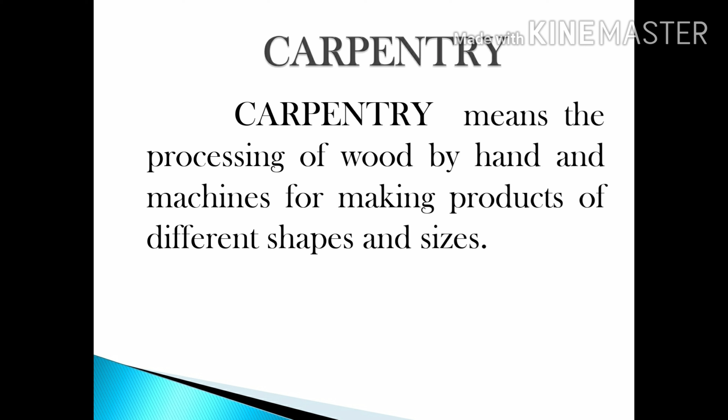We see and handle a lot of wood or carpentry products in our daily life. For example, the wood chair you are sitting on is a carpentry product. Similarly, our tables, desks, and benches in classrooms are real examples of carpentry products.

Now let me introduce some tools and equipment used in the carpentry workshop for wood processing. You can see some pictures on the screen: steel rule, try square, bevel square, marking gauge, saw, different forms of chisels, etc. I am discussing these tools just so you understand the different tools and become familiar with their names.

I know all of you are familiar with some of these tools like steel rule, try square, and chisel. Just try to understand the different names and tools used, and we will have a detailed study of these tools in coming sessions.

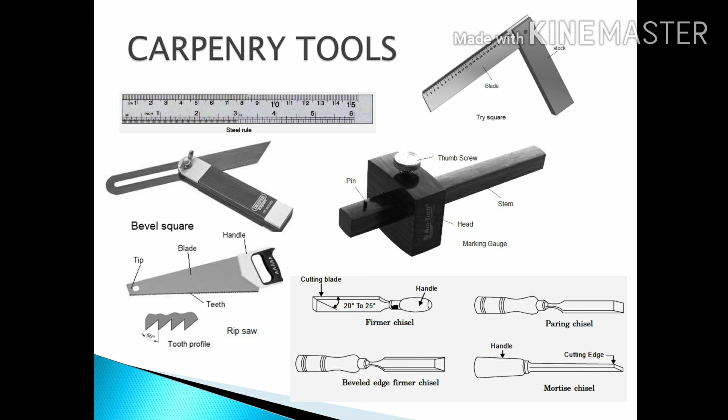Now look at the screen, you can see some models. These are some of the carpentry models we are going to practice in our workshop carpentry shops, including sawing practice, marking and planing practice, chiseling practice, cross halved joints, open halved joints, and one-side dovetail joints. By practicing these different models, students get a general idea of how raw wood is shaped into different products, the different joints, and the carpentry operations.

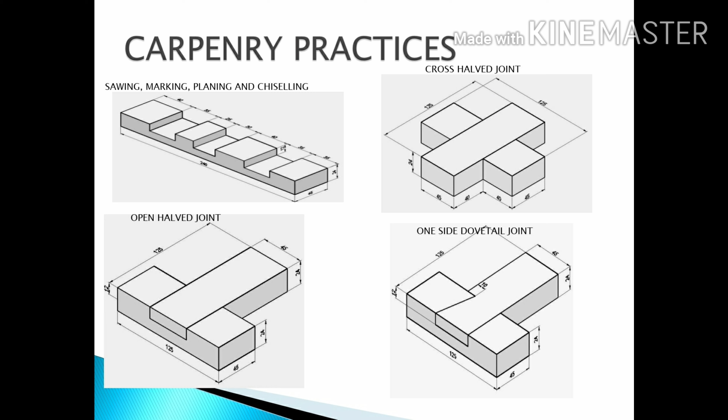The next trade we practice in our school is fitting. Fitting refers to the handwork that must be completed after machine work for assembling parts together. In mechanical engineering, different machines are manufactured by assembling different components. Before assembling these components, we should finish some works manually using hand tools, and these operations we practice in the fitting workshop.

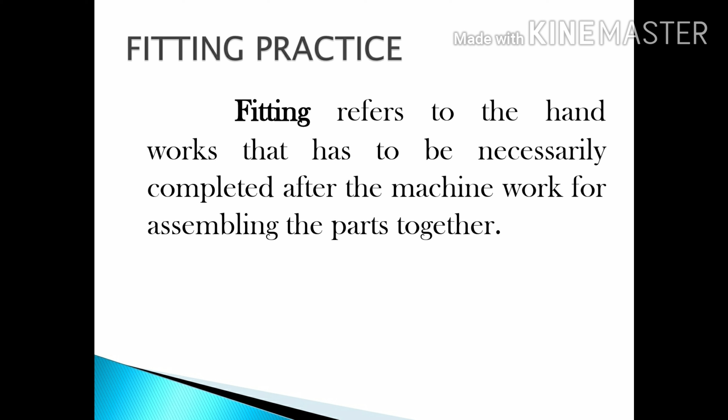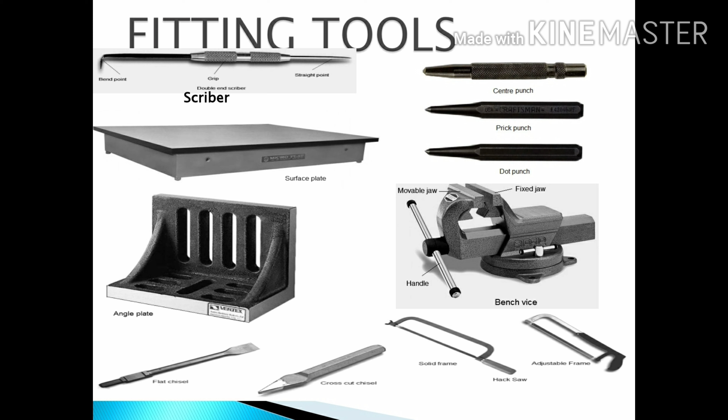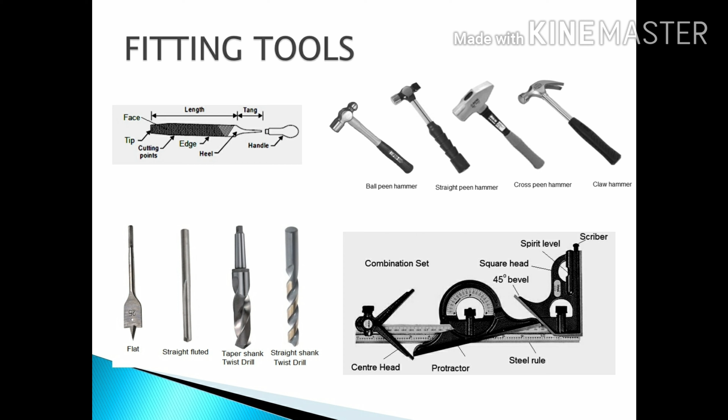Now we can see some fitting tools used in our fitting shop. These include marking tools like scriber, punch, files, hammers, combination set, drill bits, etc. Most of you are already familiar with fitting tools like files and hammers. We will study these tools deeply in the following sessions.

We can discuss the different fitting models we practice in our shop: surface filing, marking practice, punching and hacksaw cutting, L-shape cutting, etc. In the fitting shop, we work on these models using mild steel bars.

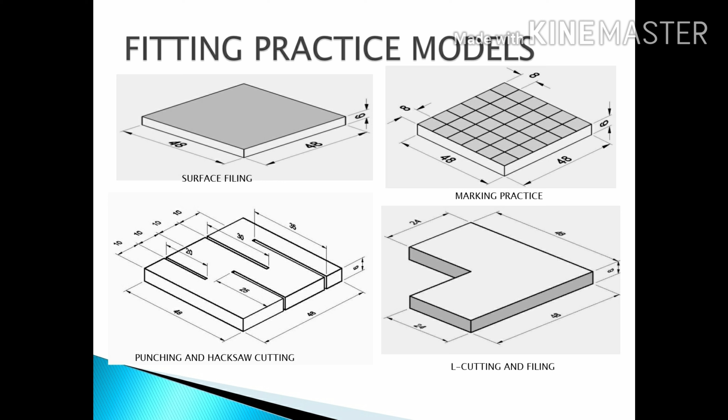The next trade we discuss is sheet metal. Sheet metal work is an operation to produce various household and engineering products from metallic sheets. You are familiar with some sheet metal products like trays, pen boxes, and instrument boxes, all manufactured as sheet metal products.

In this trade, we practice how to work with sheet metal, which means thin metallic sheets. We learn the tools we use in this trade, and finally we practice making some simple sheet metal joints and products.

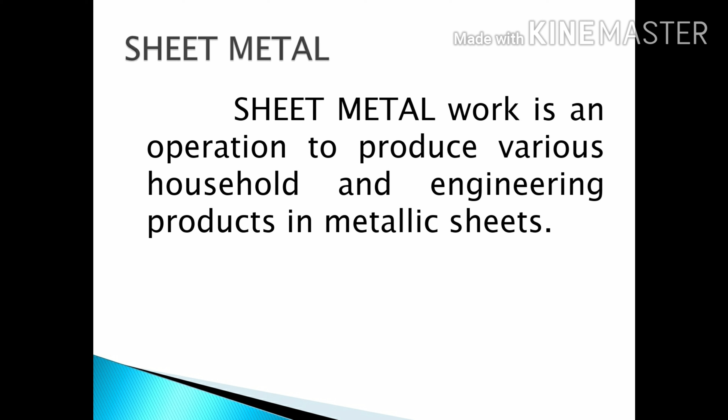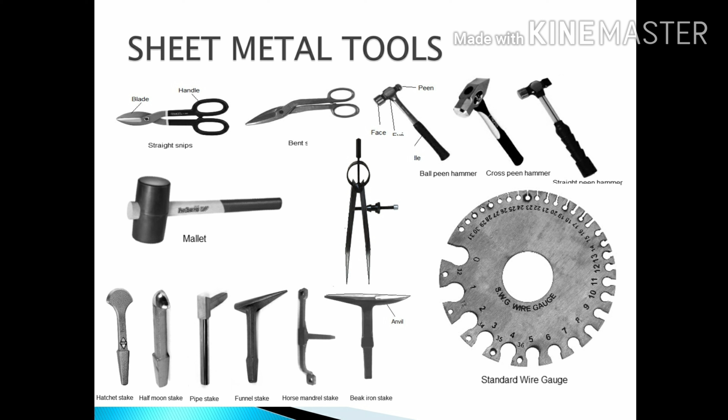In this session we see some sheet metal tools: snips, bent snips, hammers, mallet, wire gauge, hatchet stake, and some forming tools.

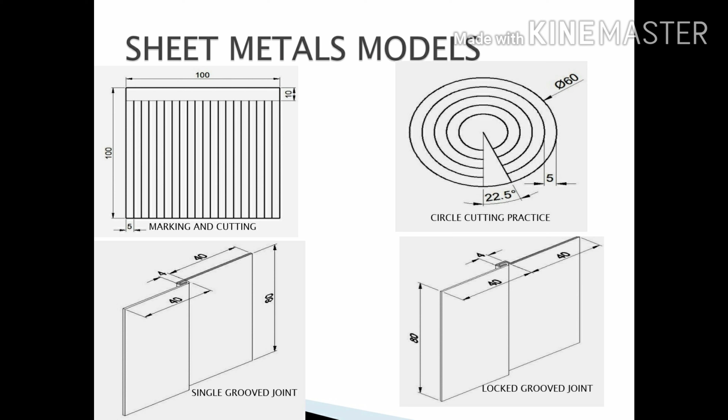We also discuss some sheet metal models practiced in this trade: marking and cutting practice, circle cutting, single grooved joints, locked grooved joints, knocked-up joint, panned down joint, etc. All these works are carried out on 26 SWG (standard wire gauge) size GI sheets.

Dear students, today we are going to conclude our session. Today we discussed the importance of general workshop practice and the different trades we are going to study in our school.

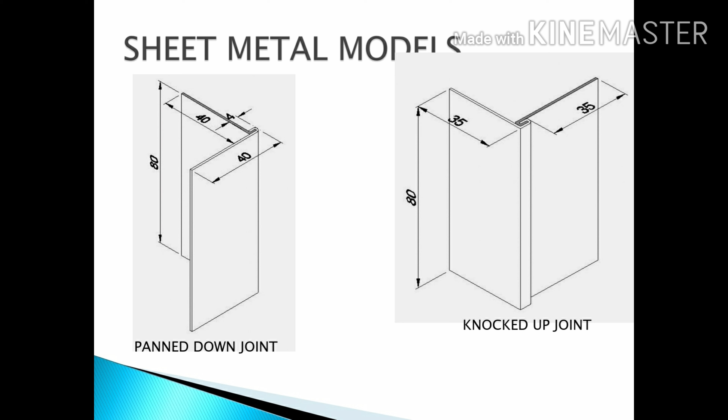What you are supposed to do is go through this video and try to familiarize yourself with the different trade names and tools we discussed. Some tools you already know, but try to understand the others. We will discuss these tools and models more deeply in coming sessions.

One more thing you have to do is bring a 200-page unruled notebook.